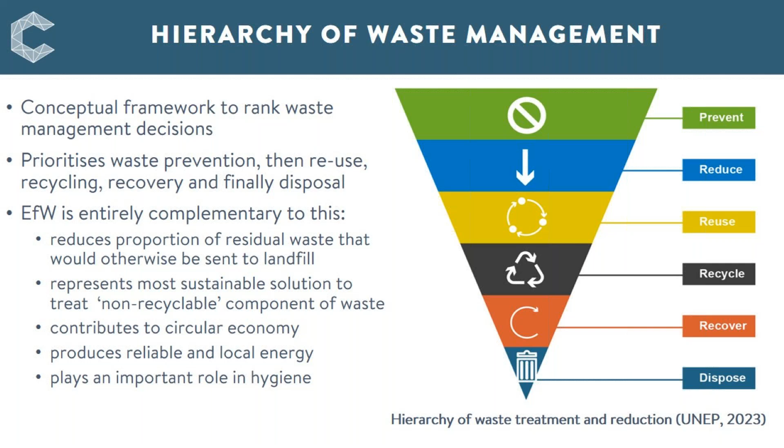Around 38%, or 800 megatons, of MSW generated globally is what's called uncontrolled waste. So it's either dumped or it's burnt in open fires. And to some extent, this reflects the access to waste collection services, particularly in developing countries. So in sub-Saharan Africa and parts of Southeast Asia, 80 to 85% of all waste is in this uncontrolled category.

If we think about the controlled end users of waste, so either landfilling, reduction and recycling, or energy from waste, this constitutes the remainder. Energy from waste currently deals with about 275 megatons, or about 13% of that waste. That could increase to 470 megatons of MSW by 2050.

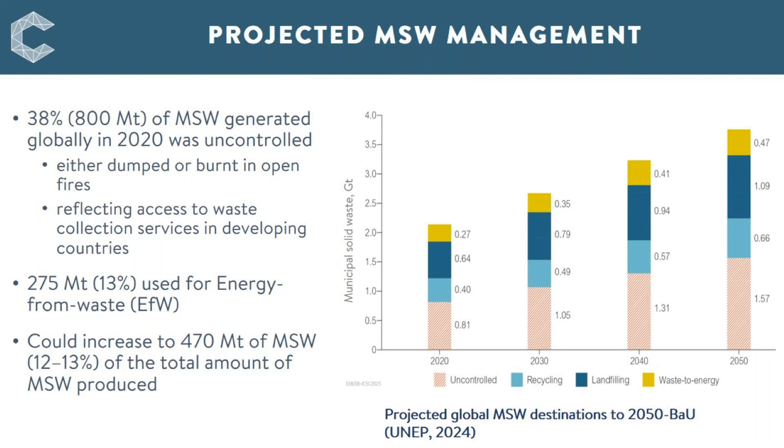The calorific value of the waste is around 10 megajoules per kilogram, and it has something like 60 to 65% biogenic content, i.e. typically food and green waste and paper and cardboard. In the UK, that value is something like 54%, typical of some of the more developed regions. In the longer term, we could think about the biogenic content perhaps reducing to around 50% as more recycling and reduction measures are introduced. So I think that's a good long-term view of what the biogenic content of waste would be. Calorific value of 10 megajoules per kilogram. Energy from waste plants typically need 6 to 7 megajoules per kilogram.

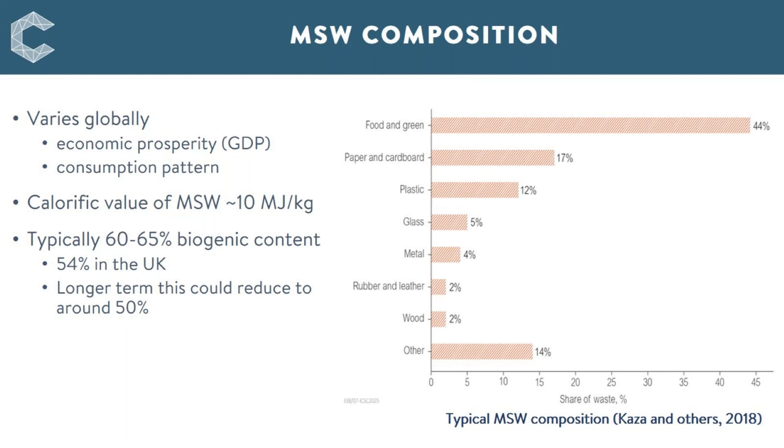In terms of energy and electricity generation, particularly from waste, the total energy production from biomass generally is around 685 terawatt hours in 2020. The proportion of that produced from MSW is 77 terawatt hours, so it's around 13% of the total energy produced by biomass, growing roughly at 4% per year from 2000 through to 2020. Europe typically leads in the production of energy from MSW, with around 64% of that 77 terawatt hours produced in Europe, whereas Asia tends to be more dominant in industrial waste and production from energy from waste.

If we think about the total global electricity demand of 28,400 terawatt hours, then energy from waste is less than 1% of total electricity production. In the UK, that figure is more like 3%. So clearly there's some regional variation in terms of electricity production. But whilst energy from waste will be a reliable source of energy using an indigenous source of fuel, something that can operate flexibly around variable energy demand, clearly it won't be a major contributor to overall global electricity demand.

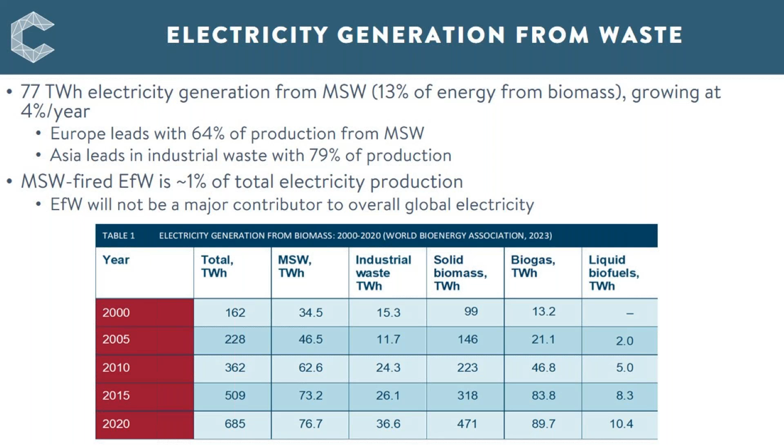If we look at the average plant size, globally it's around 14 megawatts average plant size, with more than 60% of energy from waste plants being 10 megawatts or less. So this reflects the localized solutions that MSW can offer, particularly in cities and urban locations. But having said that, as I'll come on to later, I think as we start to think about net zero emissions and transition plans, it's some of the larger energy from waste plants that will probably start to dominate.

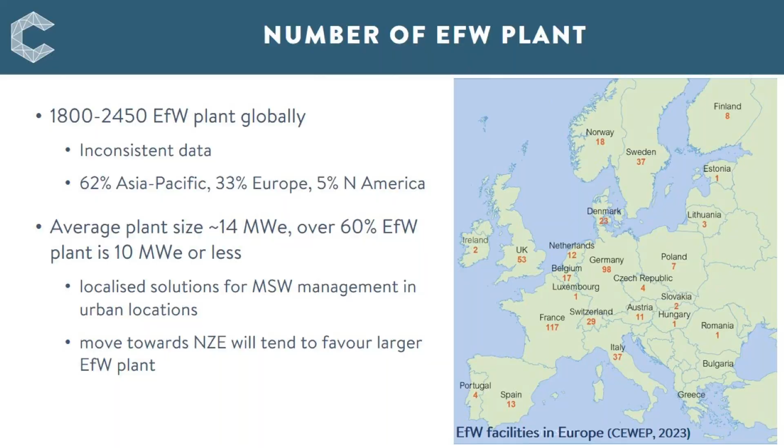Having looked at the background to energy from waste, I now want to look at some of the energy from waste technologies that could be used to deal with the waste.

The typical technologies are incineration, gasification and pyrolysis, as well as anaerobic digestion. These are all available at high technology readiness levels, typically in the 7 to 9 region.

Anaerobic digestion is a low temperature process, and therefore it's more suitable to biodegradable wastes, which can be dealt with through anaerobic processes. Whereas for the treatment of municipal solid waste, it's more the high temperature thermal treatment processes which are best suited: incineration, gasification and pyrolysis.

Incineration typically operates at 850 degrees C and produces heat and electricity through steam turbines. Gasification produces a syngas, which can be used as a chemical precursor, but also in energy plants. Similarly, pyrolysis can be a precursor for chemical plants, as well as a source of power production.

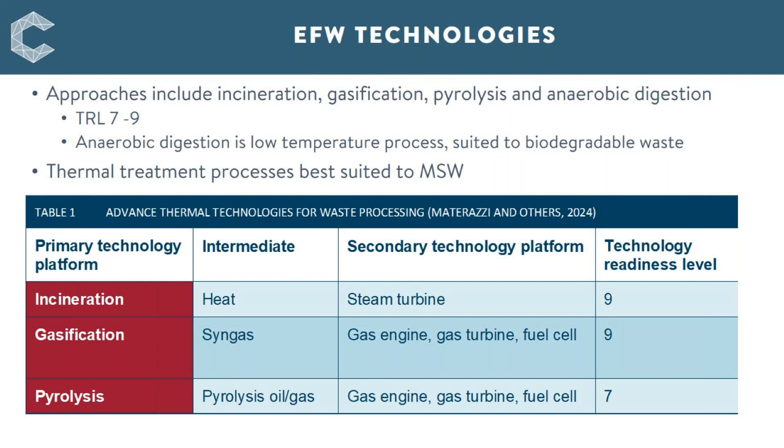The first of these is incineration, and this is by far the most common technology, representing more than 80% of energy from waste plants. It's a reliable process and can control emissions of pollutants and dioxins.

Heat is then taken out from the process via a steam turbine, typically at 400 degrees C and 4 megapascals pressure. This can deliver generation efficiencies of around 20%.

Within the boiler, the temperature is typically in excess of 850 degrees C with a 2 second residence time for control of dioxins, and by operating at low oxygen levels, it also helps to control NOx emissions. We then have an air pollution control system on the back of the plant, usually based on a bag filter system operating at 200 degrees C and below.

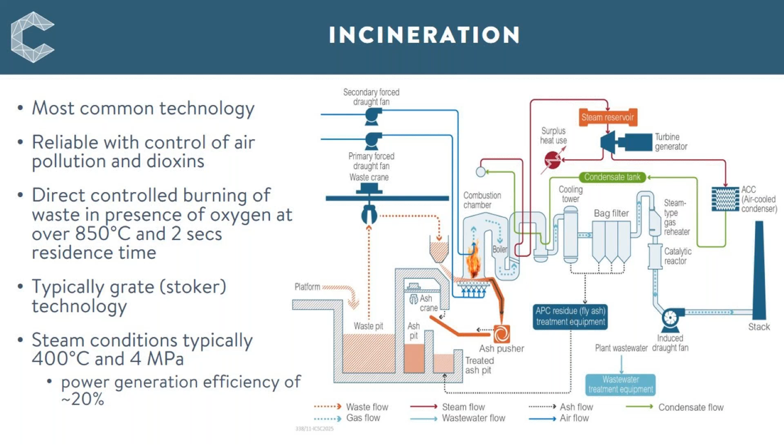Looking at that air pollution control system, this is a key part of energy from waste and its public acceptance. The cleanup process is typically based on a bag filter system.

This would remove dust by injecting alkali substances, and by injecting activated carbon. We can also control acidic pollutions, so hydrogen chloride and SOx, and the activated carbon can capture mercury and dioxins.

These are all removed with the bag filter and captured as part of the residual fly ash. That fly ash is typically treated as an industrial toxic waste and landfilled in the correct manner.

In terms of NOx emissions, we have to think about controlling these within the incineration process itself. The combustion process, by controlling the oxygen level, can help reduce NOx emissions to low levels to start with. Then we can have a selective catalytic reduction or a selective non-catalytic reduction system to effectively remove the majority of the NOx.

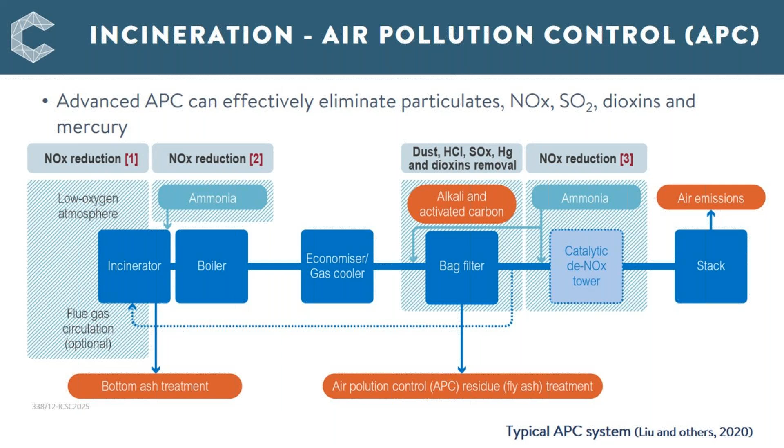Some alternative technologies are gasification and pyrolysis. Gasification typically operates at temperatures of 500 to 1800 degrees C, pressures of 0.6 to 2.6 megapascals. By operating with a low oxygen level, it can produce a syngas of carbon monoxide, hydrogen and methane, and with further processing can produce pure hydrogen.

This could be used for power generation in an integrated gasification combined cycle system, offering the potential for higher efficiencies than the 20% mentioned for incineration, or it could be used as a precursor in chemicals and heavy industries.

It does, however, typically require a more homogeneous fuel than the MSW which can be treated in an incineration plant, so this is an RDF type fuel or an SRF type fuel.

The exception is plasma gasification, which can handle raw MSW. This typically operates at 10,000 degrees C, but it does need a higher energy consumption to do that. The electricity demand is typically 1,200 to 2,500 megajoules of electricity per ton of waste treated.

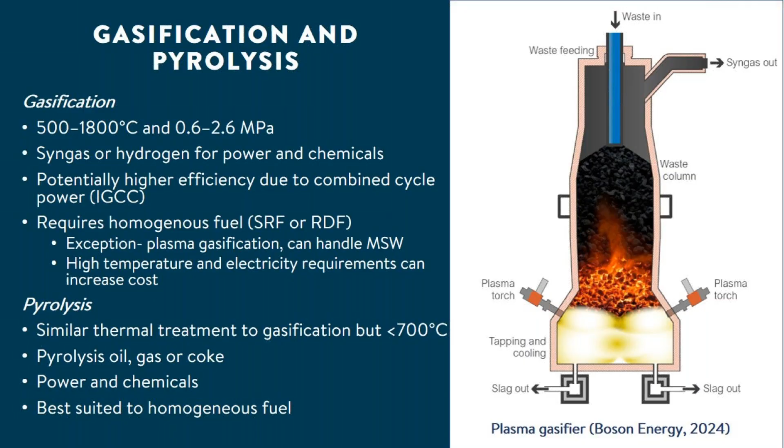Having looked at the technologies, I now want to look at some of the opportunities to decarbonize energy from waste. Thinking about the fuel that energy from waste uses, as I showed earlier, it typically has a biogenic content of around 65% on a global basis. This means that the biogenic component of energy from waste, when burnt, is effectively net zero.

The fossil fuel component, things like plastics, does have a positive emission. But if we add carbon capture and storage to the energy from waste plant, capturing 95% or more of the CO2, then the biogenic component becomes net negative, and the fossil fuel component becomes net zero. Overall, the energy from waste plant is a net negative, or greenhouse gas removal technology.

There's also the advantage that if we divert waste away from landfill, it wouldn't produce methane in the landfill, and methane has a much higher greenhouse warming potential, something like 28 times that of CO2. So it's positive in reducing methane emissions from landfill, but by installing carbon capture and storage, we can also be a net negative power plant producer.

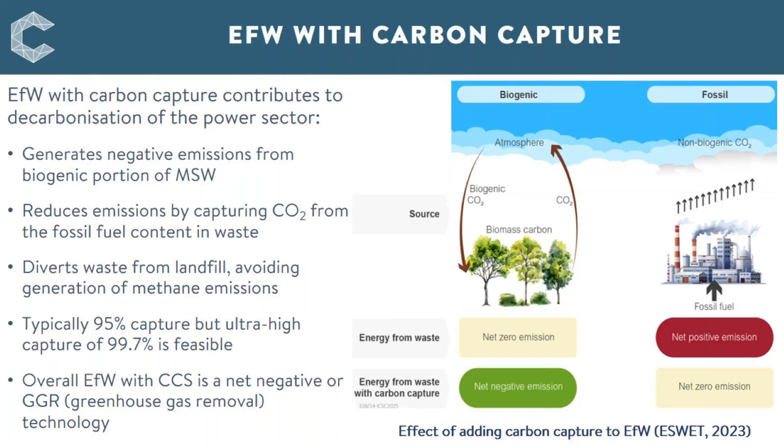Looking at that greenhouse reduction potential, the pathways to achieve zero emissions by 2050 all require greenhouse reduction. The IEA net zero emissions pathway needs something like 1.9 gigatons of CO2 per year of negative emissions from biomass carbon capture and storage and from direct air carbon capture and storage by 2050. Projections from the IPCC have even higher levels of BECCS and DACs being needed, something like 3.5 to 16 gigatons of CO2 per year by 2050.

The greenhouse gas removal potential of energy from waste: if we retrofitted carbon capture and storage to all energy from waste plants, this could deliver something like 220 megatons of CO2 per year by 2050. That would represent 12% of the net zero emissions pathway requirement of greenhouse gas removal.

A further advantage of energy from waste is that it's available in the relatively near term. The fleet of energy from waste plant is already installed. Carbon capture and storage technology is commercially ready and available to go. So the critical path would then be dependent on the availability of CO2 transport and storage.

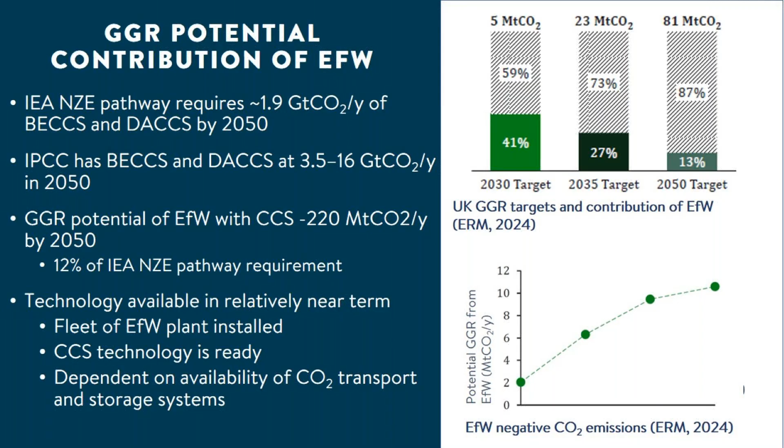The pipeline of energy from waste plant with carbon capture and storage projects is already building, with something like 21 energy from waste plants in the CCS pipeline, as shown by the Global Carbon Capture and Storage Institute. That's a relatively small proportion of the total CCS pipeline, thinking about there being 450 or so plants altogether. It's around 3% of the total number of plants, but it's growing. It represents about 1% of the total CO2 storage potential, at just over 5 megatons of CO2 per year.

I just want to highlight one of those projects as an example of what's happening. This is the Hafslund energy from waste plant based in Klemetsrud in Norway. It's been producing power since 1985 and is the largest single point source of CO2 in Oslo. It treats 350 kilotons of waste per year, and once CCS is installed, it's planned to capture 350 kilotons of CO2 per year. There's actually been a pilot carbon capture and storage plant operating at the site since 2015 as part of an earlier feasibility study carried out by ACA.

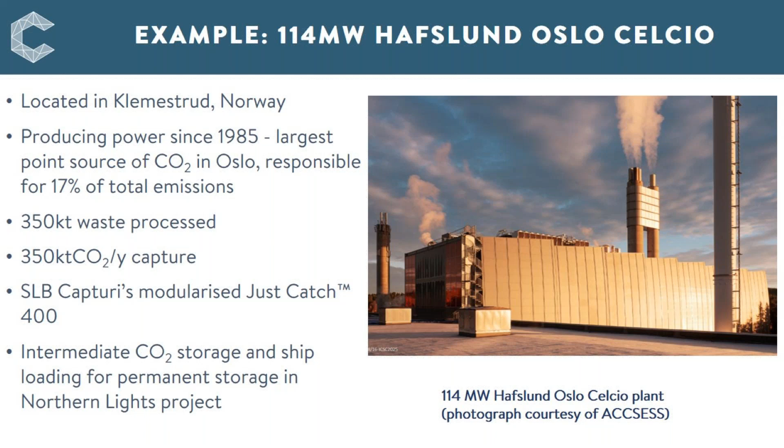Hubs and clusters. So I mentioned earlier that it's likely that carbon capture and storage will first be installed on some of the larger energy from waste plants. So I show here an example in the UK, which is the HyNet cluster project. This will take CO2 and store it 1 kilometre below the seabed in the Irish Sea.

There are 2 projects within this cluster which are energy from waste related. It's a Viridor plant and Protos Energy, which together will capture more than 1.2 megatons of CO2 for permanent storage in the Irish Sea. So I think it's these larger energy from waste plants that will account for early deployment,

because they can take advantage of the CO2 storage and CO2 pipelines that will be provided by these large industrial clusters. Although longer term, there will be the potential for more dispersed energy from waste assets, potentially using rail or truck transfer. And then even longer term, there's potential for smaller energy from waste facilities, which aren't necessarily contained within these industrial clusters, but they could maybe use their CO2 in local greenhouse and industrial applications as part of circular economy solutions.

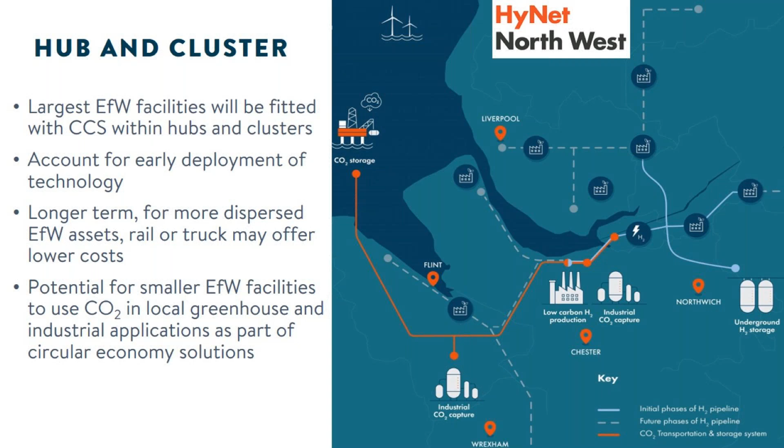Looking at the cost of energy from waste with carbon capture and storage. Based on studies in Europe, the overall cost of CCS and thermal waste treatment is estimated to be in the region of maybe 75 through to 130 euros per tonne of CO2.

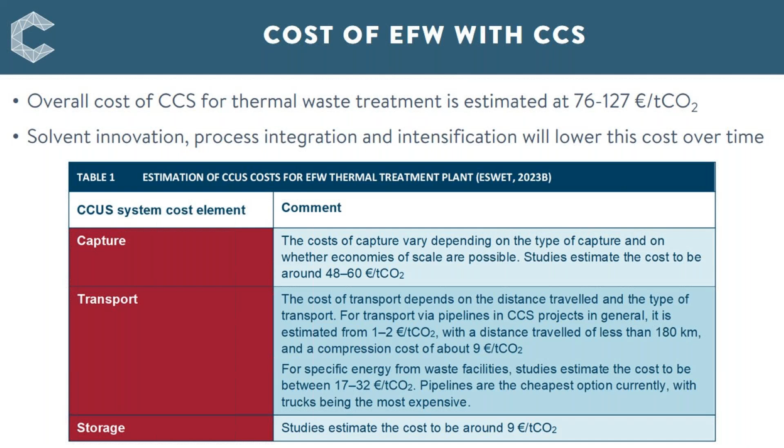Moving on now to co-utilisation. If we think that coal will remain the dominant source of energy for much of Asia, then MSW, or more significantly the biogenic proportion of MSW, could be used to co-fire with coal and therefore reduce its CO2 emissions, making these plants zero, or if the co-fire ratio was very high, maybe even net negative emission when combined with carbon capture and storage.

Some studies in China have, however, found that adding MSW to existing pulverized coal plants can increase the potential for NOx emissions, HCl emissions, and fouling and slagging within the existing pulverized fuel plant. So this may limit the amount of co-firing, if it's solid RDF and SRF co-fired with coal, to around 10%.

We could, however, convert the MSW into a waste-to-fuel, converting it to syngas or hydrogen or ammonia, rather than co-firing solid RDF, SRF mixed with coal. By doing that, we could get around this issue of slagging and fouling, and could therefore go to higher co-fire ratios, delivering net zero emissions in coal-fired plants.

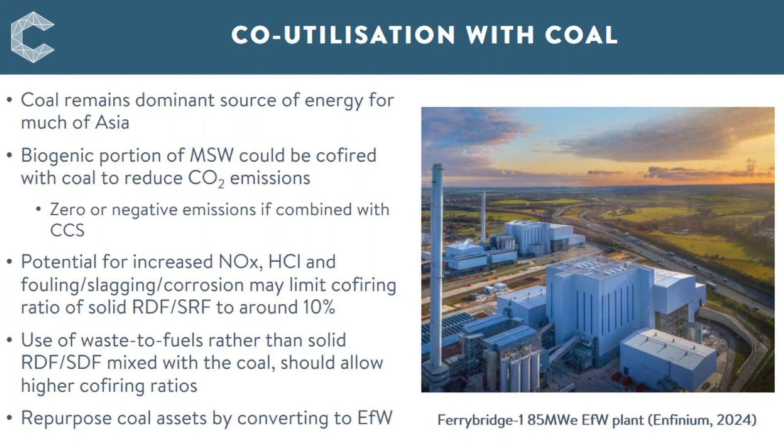Materials recovery is the next area I want to look at. Energy from waste plants can produce materials from the residual fly ash and bottom ash within the energy from waste system. This can lead to additional recycling of metals and minerals, which otherwise would have escaped the recycling available earlier on in the hierarchy of management.

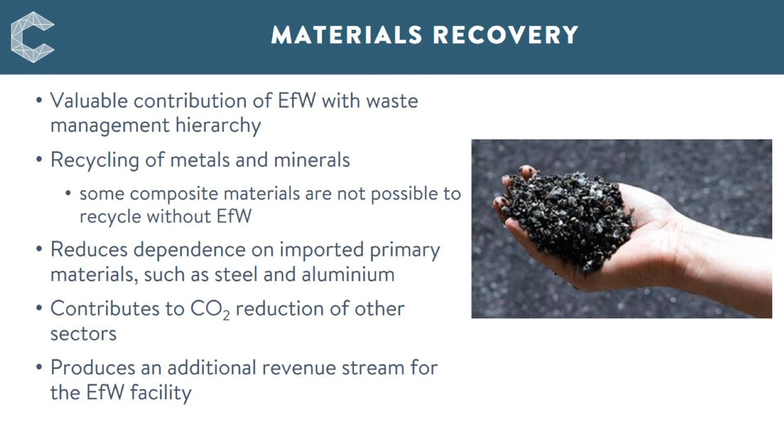If we can recapture metals, this can reduce the dependence of countries on primary materials such as steel and aluminium. It can contribute to the CO2 reduction of those sectors. Thinking about aluminium, for example, recycled aluminium uses 5% of the energy of producing primary aluminium, so clearly it can be a major contributor to CO2 reductions of that sector. It also produces an additional revenue stream for the energy from waste facility, helping to contribute to the economics of such a process.

Metals recovery then: bottom ash typically accounts for 20 to 25% of the weight input of an energy from waste plant. The bottom ash itself is 80 to 85% weight of minerals, and of that 10 to 12% weight is ferrous metals, so steel and iron. These can be separated by conventional magnetic separation technologies and can recover 85 to 95% of those residual ferrous metals.

It also contains around 2 to 5% of non-ferrous metals. This includes things like aluminium and copper, and they can be captured by eddy current separation processes. Currently around a third of these non-ferrous metals are recaptured in European energy from waste plants, so clearly there's significant scope to capture more. That's partly due to some of the difficulties of capturing things like aluminium, due to the chemical complexity of how the aluminium is bound within the ash. But nevertheless, clearly there is scope for significant further capture.

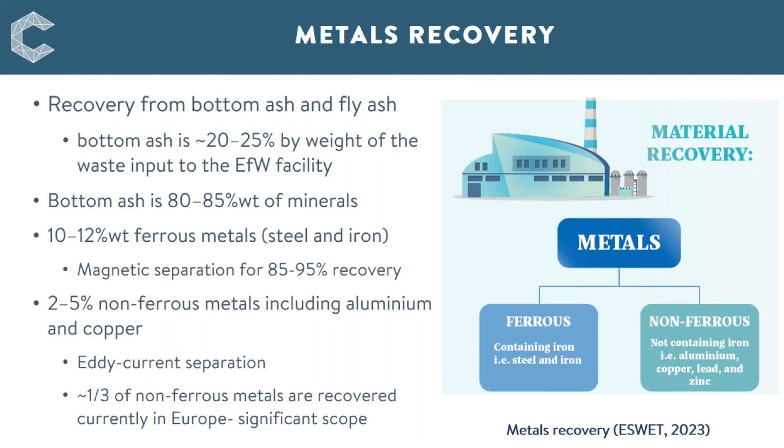Mineral recovery is a further opportunity. So once the metals have been recovered, allowing the ash to stand for 6 to 20 weeks, the ash can then be stabilized and used as a source of minerals. These minerals could be used as secondary aggregates for road construction and in building projects. In countries like Denmark, legislation has already been introduced to allow bottom ash to be used in these construction projects, and there 99% of the bottom ash is now recovered and used in this way. If that was rolled out to other countries, there's good potential to utilize the minerals as well as metals in these kinds of applications.

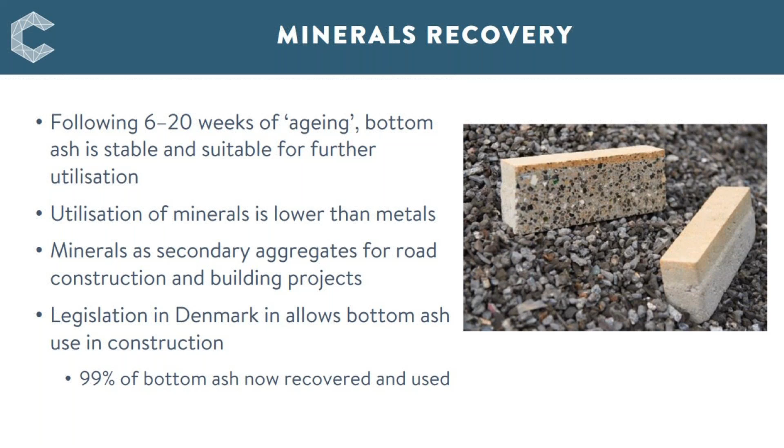Now I want to move on to the final area that I'll look at, which is the support required to make these energy from waste plants happen. At an international level, things like the Kyoto Protocol and Paris Agreements have set countries on a path to net zero emissions and shown how energy from waste can contribute to that.

National policies are also being introduced. In the EU, we have the Waste Framework Directives and the Net Zero Industry Act, which came into force in June of last year. The Net Zero Industry Act is looking to provide 50 megatons of CO2 capture infrastructure in Europe by 2030. In the US, there's the Renewable Portfolio Standard, and other countries also have their own policies looking to provide the framework for energy from waste plants to materialize.

There are also financial incentives through instruments such as feed-in tariffs, landfill taxes, which typically increase in value per year, and guaranteed power offtake agreements for energy from waste plants.

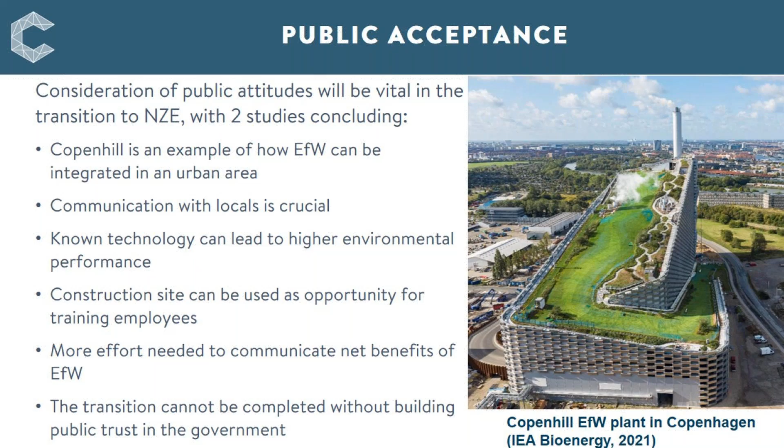So finally, I just want to wrap up with a few key messages. I think I've highlighted the growing issue of waste, how waste is currently at the level of 2.1 gigatons per year, and in the absence of measures, it's going to increase perhaps to 3.4 to 3.8 gigatons per year by 2050.

Energy from waste can play a key role in the overall waste management hierarchy to deal with this waste. It can process around 450 megatons of non-recyclable MSW components, so around 13% of the total MSW, and can reduce the amount of waste that would otherwise be sent to landfill. At the same time, it can produce 1% of the global electricity energy demand. Not a significant proportion, but an important contribution nonetheless, and one that is reliable and uses an indigenous source of fuel.

It can recover materials that were not recovered earlier on in the waste management hierarchy - it can recover iron, aluminium and other metals, and can use those to support the circular economy. But perhaps the most crucial contribution is that energy from waste could contribute up to 12% of the greenhouse gas removal that the IEA thinks will be needed by 2050.